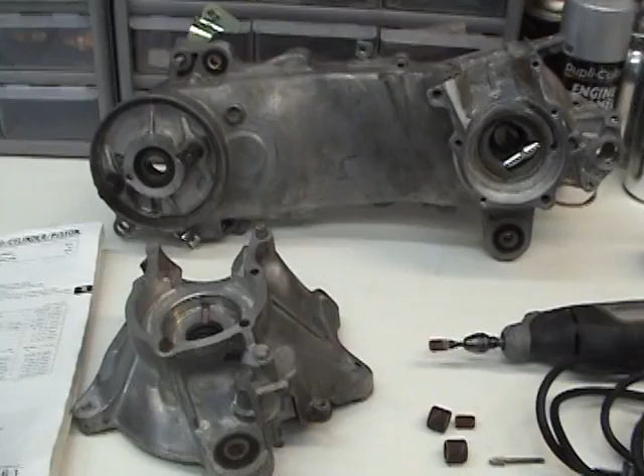Now, in order to do the next step, you have to have patience. If you don't have access to a lathe or a machine shop that does this - and I've never known one that could do it. I mean, they do it all over the place, but in this little town they don't.

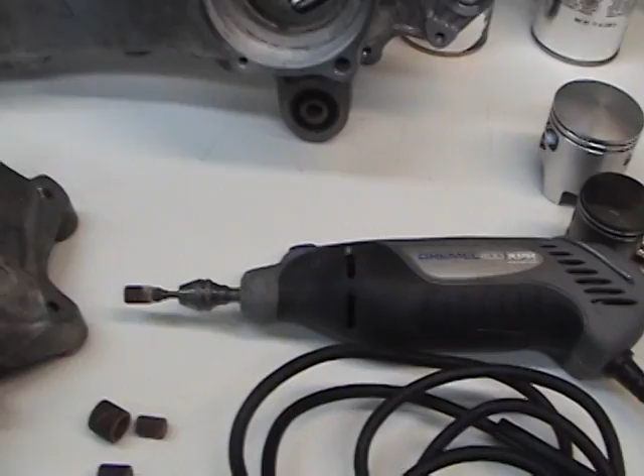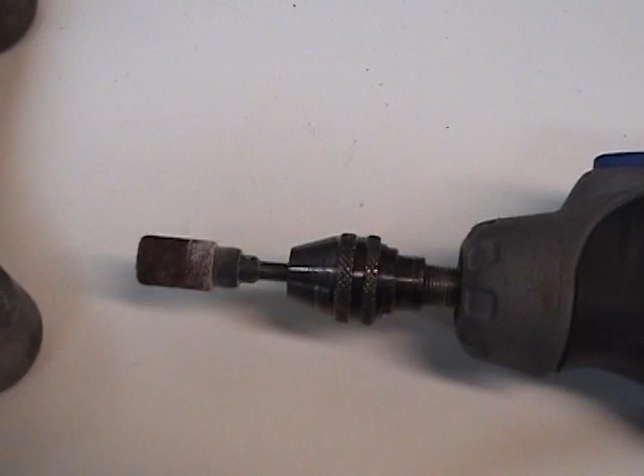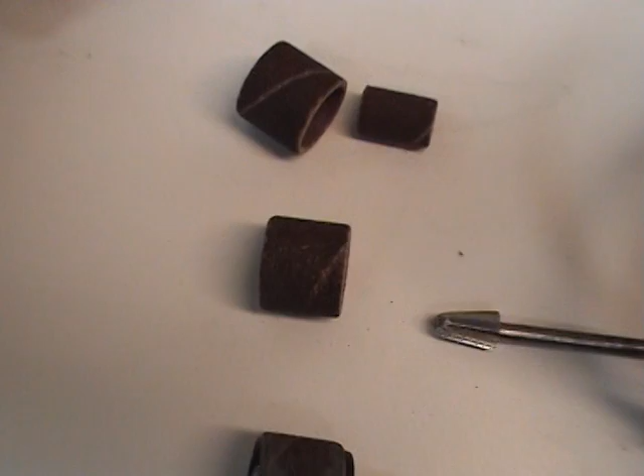But I use a Dremel. You can use either the electric or the battery powered one. And I use these little bits here. This is about 80 grit sandpaper barrel - that's the small one. Or I'll use the larger barrel, which is about 60 grit. I also use these Christmas tree stainless steel bits. They're about $5 a piece.

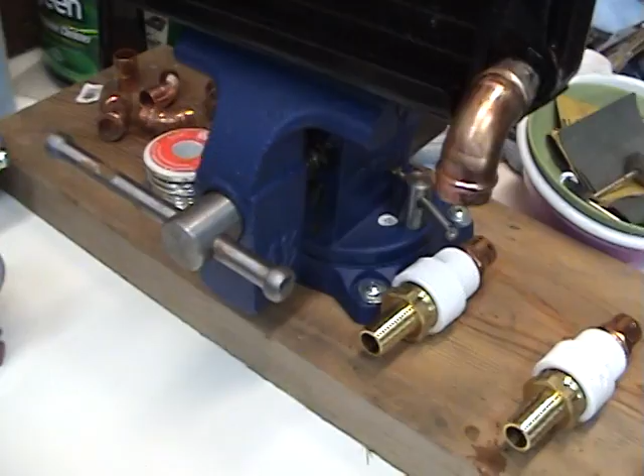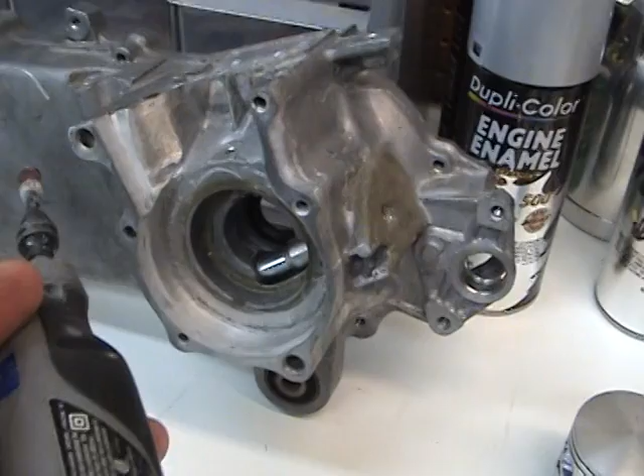But what I do - the best way to do it - is take your block and put it in a vise so that you don't have to hold it. Then you can take your Dremel right here and slowly start to work on it.

Now, it takes time and patience to do this, but I'll tell you, if you've seen my videos and my motors, it can be done. It's not that hard - you just have to have patience. But you keep on going, and as you do it...

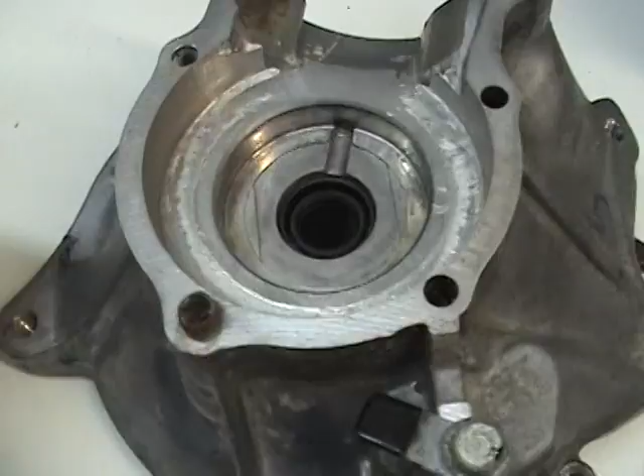I'll take the stroker crank, and I'll have a set of dummy bearings that I put in here, and I'll explain what that is. Dummy bearings are bearings that have gone bad, and the bearings are press fit into these races. What I do with the bad bearings is take the outside of the bearings and sand them so that I can just drop them into the races and put my new crank in there.

What it does is it's a guide. The bearings are no good, but they are an actual representation of what a new bearing would be, and so they guide the crank right down the center of where it should be, so that when you go to put this together for the final time and press fit the cases together - this one and this one - you'll know that your crank is going to spin correctly and not catch anything. I'll tell you, it's no fun to pretend that you can put the crankshaft in and press the cases together and then it doesn't work right. I do that on both sides, and I'll show you my dummy bearings in later videos.

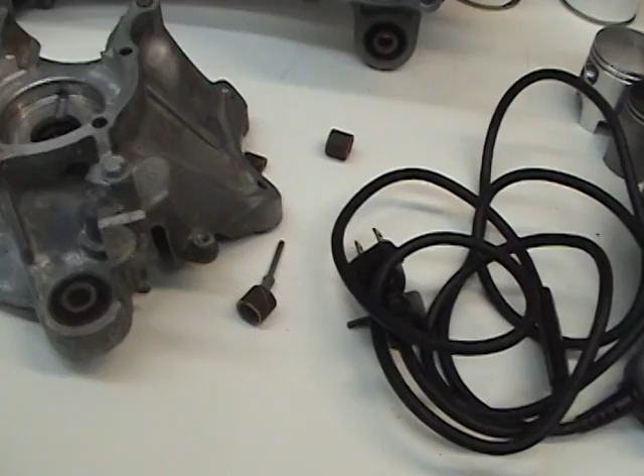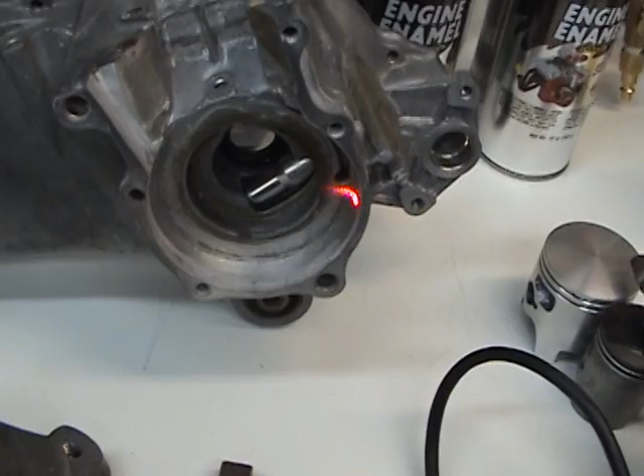But I'll take my small pieces and slowly work the diameter out from here over to here. I think it takes about 2 millimeters. When you put the crankshaft in, the new stroker crank, all you need is about 1 millimeter clearance between the outer edge and the crank itself - the crank weight, crankshaft weight.

That's all you'll need. And sometimes when you put your oil plug in, which I prefer to use, you may need to sand it on the top right here.

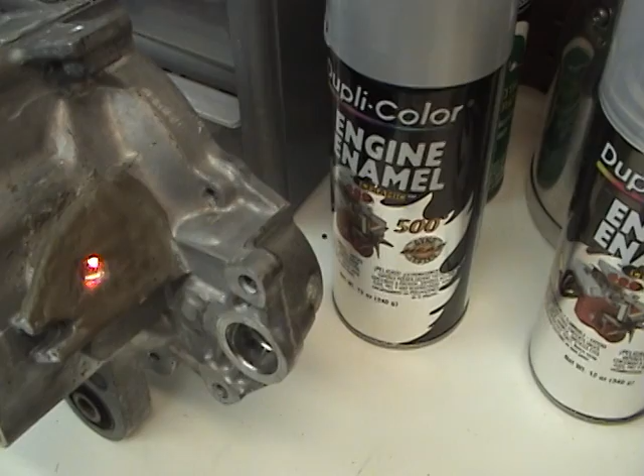Now what I've found is on this plug, it has a threaded slot, so that you can put a bolt in there and pull it out. I use JB Weld around it - remember, there can be no air leaks. So I use JB Weld, and it worked really well. If I ever need to take this off, all I do is grind this off, and the plug will pop right off.

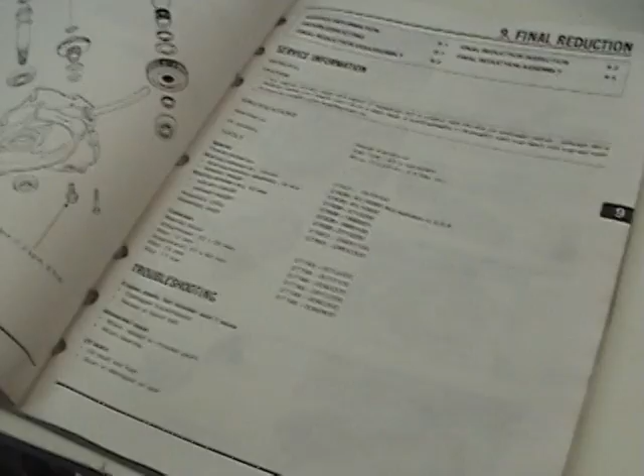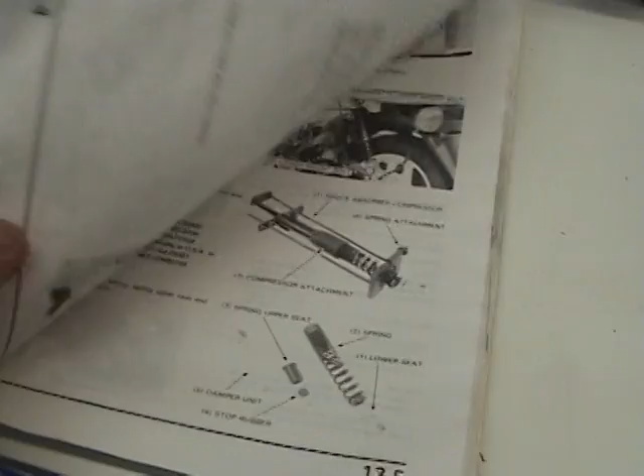And then what you want to do is get one of these books. This one is for a 92 and 93. A 94 to 2001 is a slightly different one, and I've only seen one of them - I've never seen one that I could buy. You could buy these off eBay for $5. But the newer model for the 94 to 01 engines are just a little harder.

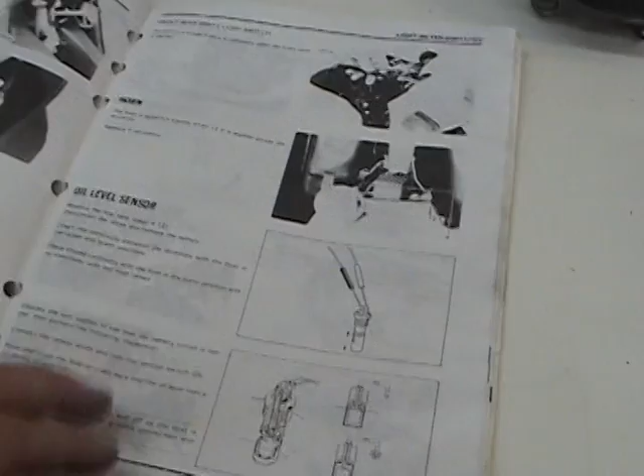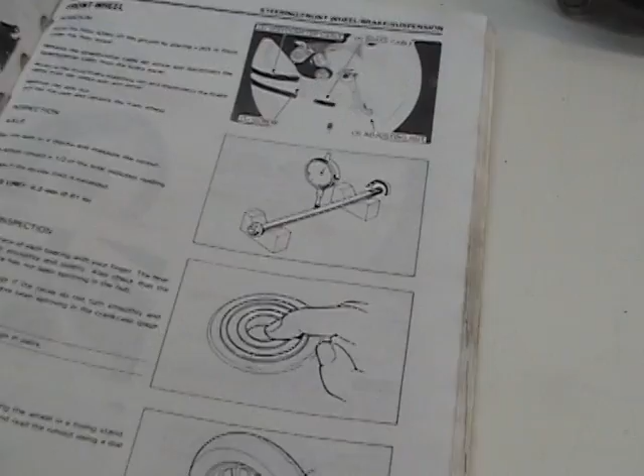And they have a lot of really cool tools in here for the mopeds, but you can't buy them. You can buy some of the parts, but not a lot of them - the tools for the crank and the bearings and different things.

So the next step is going to be putting the dummy bearing in and working with the tool here to get it where we want.

Now we have to remember that Honda spent millions and millions of dollars on this design for this engine. This engine is bulletproof - it hardly ever breaks. They have spent hundreds of thousands of miles on all their bikes, and their parts don't break. The Japanese have done an excellent job on building a very, very good block. So if you have a problem with other engines, other brands, this Japanese 49cc engine block is the gold standard when it comes to building your little deals. So if you have one, God bless you.

And God bless the people of Haiti. I hope they get better. And I hope that the earthquake wasn't the first opening of the scroll from God, like the first sign of the seventh sign in that movie.